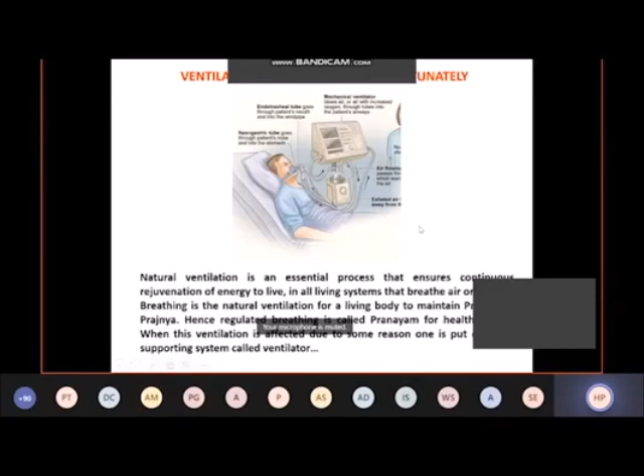In many hospitals across the world, data has already been provided by Professor Mohan Singh on what is happening across the world. And what is happening across the world? There are migrants everywhere, migrants in search of a comfortable place to continue the rest of their life. In fact, what I find is that human beings become migrants a little later. COVID is the fastest migrant in the world.

Because COVID is riding a migrant, it just gets a migrant as a host and travels all over the world. This is how COVID started migrating from one end of the world to the entire world. And it has made us human beings migrate from one place to another in search of comfortable living.

But that was because the ventilation in the human body is affected because of a small virus called COVID-19. What about natural ventilation in architecture or the built form in which all of us individuals and families reside? See, the definition of natural ventilation in architecture has been inletting of outdoor air into a space to control indoor air quality by diluting and displacing indoor pollutants, control indoor temperature, humidity, and air motion to benefit thermal comfort. This is a modern day definition of natural ventilation, created after maybe scientific study.

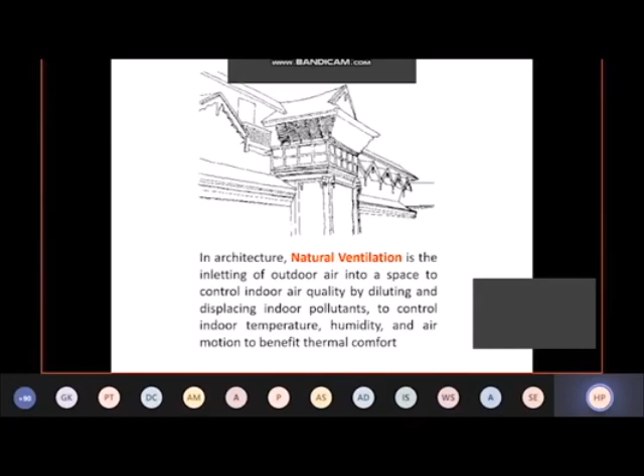But this was always known to human beings since ancient times, since the time human beings started making shelters, especially in the tropical world, because we all know that in the tropical world, it is next to impossible to survive without natural ventilation. And you can see this if you study architecture of the tropical world, which I have studied and I have done my PhD research into this particular aspect. Natural ventilation has been an essential part of all vernacular and traditional built forms. You go to any village in India, any vernacular or traditional built form. India specifically, because India has got multiple climate conditions, more tropical in nature.

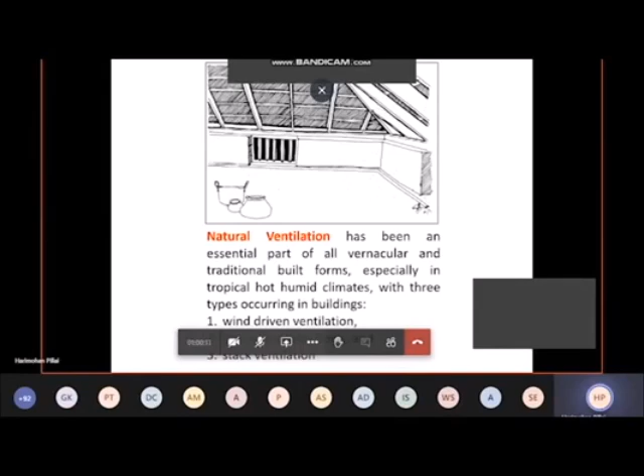So in all these tropical hot humid climates, three different types of ventilation systems happen: wind-driven ventilation, pressure-driven flow, and stack ventilation. All of us architects who have studied this in detail as part of climatology are aware of it. Where has all this knowledge system, which has been there as part of our traditional built forms, gone today? Look at the kind of traditional built forms which we have created in our world, the kind of houses that breathe for humans to breathe.

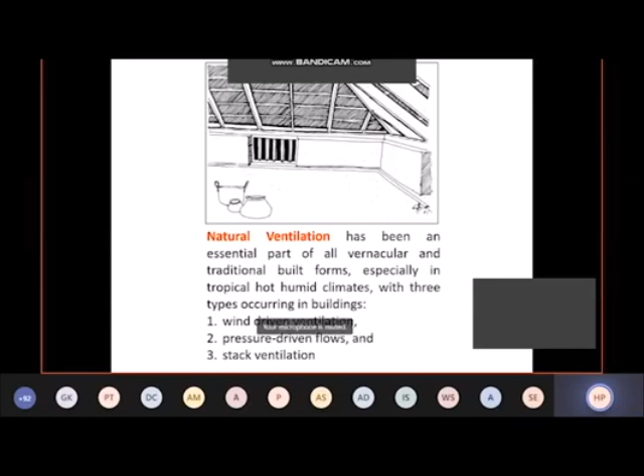We only have to travel from the north of India to the south of India, from the east of India to the west of India. We will see 8 different climatic conditions and fascinating traditional breathing spaces in a kind of an architectural zoning of India, which I have tried to create here. Whether you go to Rajasthan or Madhya Pradesh, Maharashtra, Tamil Nadu, Kerala, there are fascinating houses that breathe for humans who breathe. And this is all documented, very well known to all of us as architects.

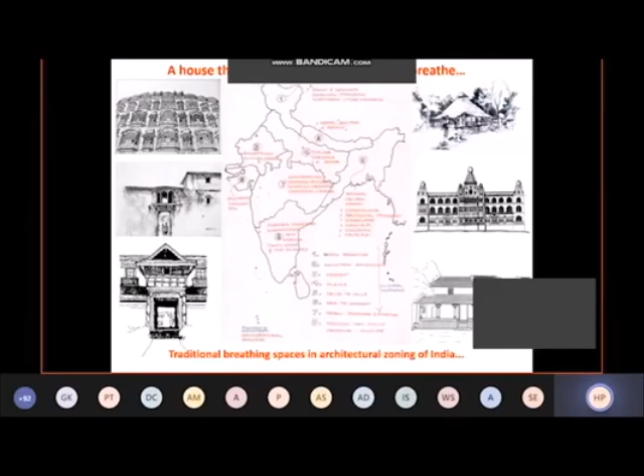Ventilation in transition spaces. We already knew for centuries how to create this. This is a simple example of a small 200, 300-year-old house which still exists in a village in Kerala. Transitional airlock. When you come from outside, hot sunshine, before you enter the main household, you enter into a transitional airlock space where the air temperature suddenly comes down, a well ventilated space, where you take rest for some time or where you relax and talk to your friends. And then you move into your inner spaces. Ventilation in transition spaces. We already knew about this.

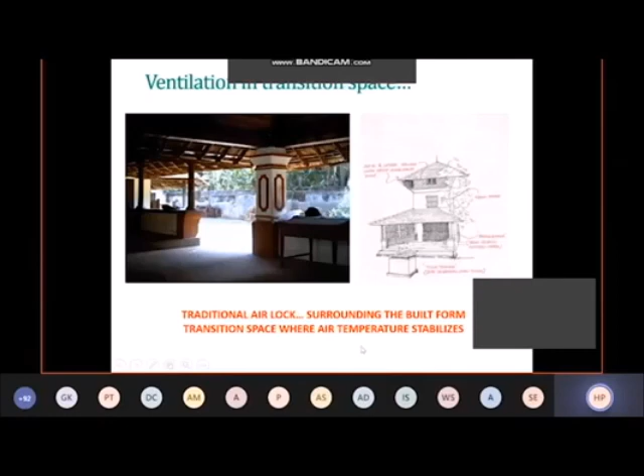Ventilation at many levels. You see, modern day architecture talks about only ventilation at fixed levels. We have fixed the levels of ventilation. We have something called a fixed sill level, fixed ventilator level, fixed beam bottom level, and so on. But if you look at traditional built forms, especially in our country, you will find ventilation at many levels, not necessarily at a fixed level. Here is an example of a wonderful ventilation which allows light as well as air at floor level.

It is the floor, actually, this is the landing of a stair. You come up the stair and you reach a landing which is not only ventilated with light but air as well. And these kind of ventilators you find at each floor level in houses in Kerala, very old, 200, 300-year-old houses in Kerala. I'm sure not only in Kerala, but in many traditional households across India, you will find not a fixed level of ventilation, but varying levels of ventilation at different levels.

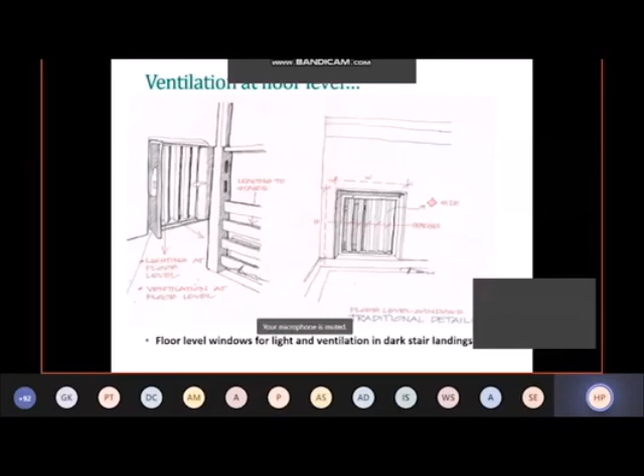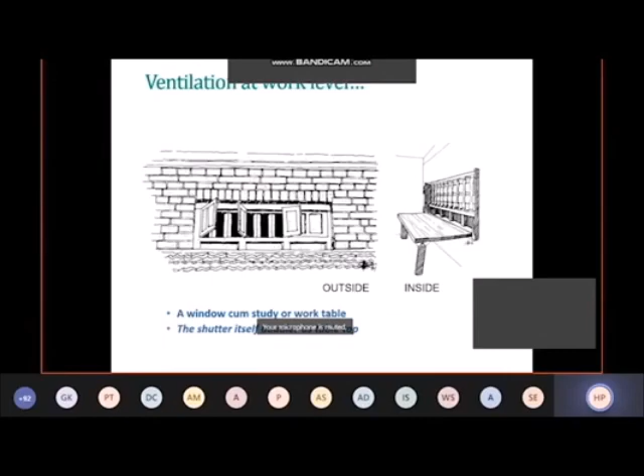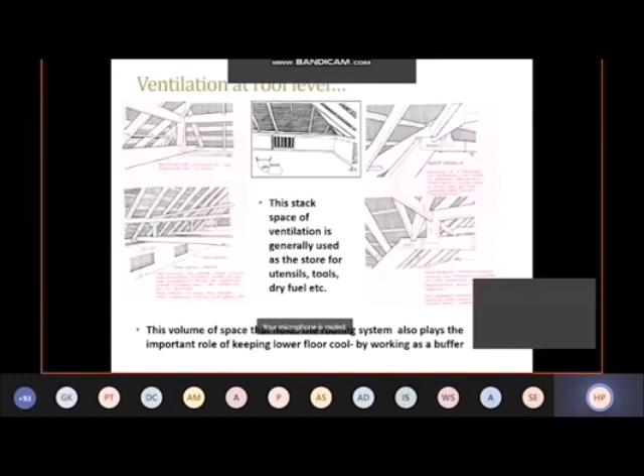The volume of that space, which is the roof, also has ventilation to ensure that from the living spaces below, there is continuous ventilation to upper levels and out into the open air. So all these things also work as a buffer to ensure temperature control in the spaces which are designed below these roof spaces.

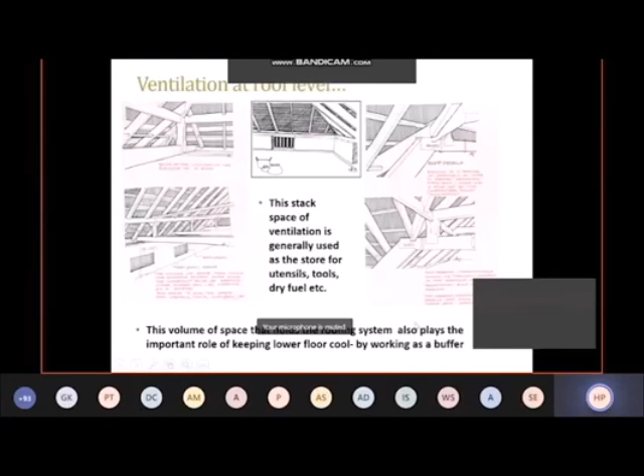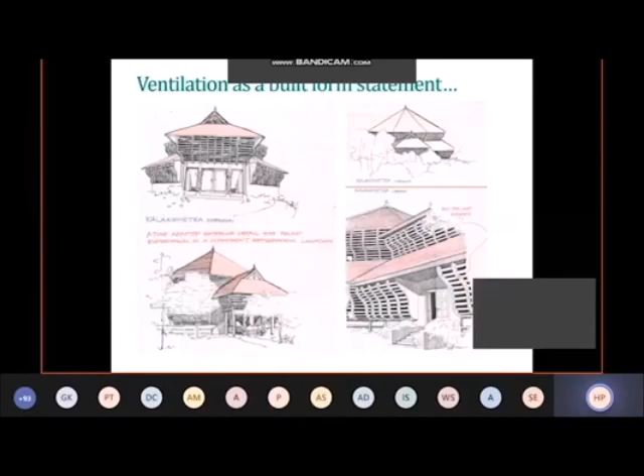Ventilation as a built form statement. Kerala's traditional architecture, if you look at the built forms, they are actually a built form statement of wonderful ventilation in tropical climate. Though this is not a built form which was made in the ancient time, this is inspired from ancient traditional architecture having wonderful ventilation.

We know very well that COVID has become a migrant which just captures a host, especially all those hosts who have been living in air-conditioned environments, getting treated in air-conditioned environments in hospitals, traveling in air-conditioned environments such as aircrafts, going through air-conditioned environments such as shopping malls and offices. They are the hosts on which COVID survives. But can COVID survive in a well-ventilated environment? This is something to be researched upon, and this is the time when we need to research.

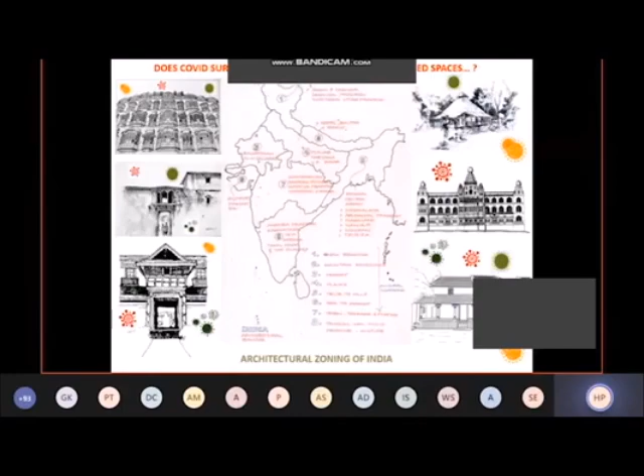World over, large number of humans have been confining themselves to artificially ventilated and air-conditioned spaces. Our body itself is a classic example of a passive system that continuously adjusts itself to changing temperature, humidity, and air flows in the natural environment. We adjust ourselves. When we come from sunshine to shadow, we adjust ourselves. Similarly, architecture spaces in ancient times have been created, very unique to each climatic zone, which provide necessary body comfort in each region. But active systems have standardized these living conditions.

That is the problem. We have to accept that active systems which we employ while traveling, in built forms, in work areas, have standardized living conditions. And in the process, these standardized living conditions have killed not only the uniqueness of traditional living, traditional architecture of each region, but also the uniqueness of the adjusting capacity of a human being. That is also killed. No capacity for a human being to adjust to the changing environmental conditions because of standardized living conditions created by active systems.

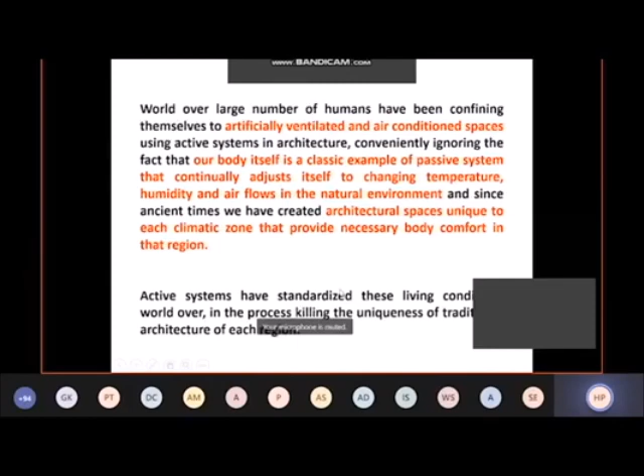There have been a lot of questions on active systems by many of the participants who have sent to me in advance, but I believe that active systems have only standardized living conditions, and it is high time we thought about these active systems, how to get rid of this active system and get back into the natural systems of living.

In today's emergency situation of the COVID pandemic, it is worth studying who or what kind of humans are most affected, architecturally speaking. How can we do this as architects and planners? Study what kind of humans are most affected because of COVID. Can we create data based on their architectural background? Do they belong to the category of folks living and working in an environment dependent on active systems? Or has the pandemic struck people who live in natural surroundings? Or will it continue to strike people living in natural surroundings? Or will it continue to strike people living in actively supported environments? This is a question we have to ask.

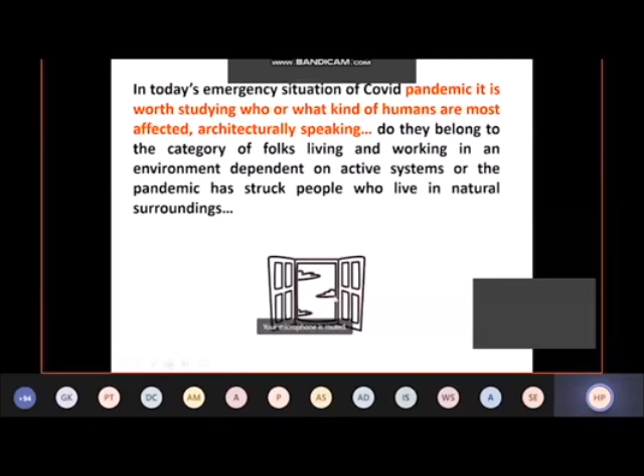This time, I believe, COVID time is ripe for the immense amount of data which is today available to us to do research as architects and planners. And where is this data available? This data is now available. Live data is getting created day by day because of this COVID pandemic. Data which is available to architects and planners to understand the relationship between health and the human built environment.

People know that a physician plays an important role in their health. We all know it. But sometimes building designers can play a very nearly equal role. This is something to be understood. Building designers such as architects and planners, who bring together several buildings in a dense formation of what we call a settlement or city, also play an equally important role like a physician.

And it is time, especially in these COVID times, that we started researching the role of architecture and planning in human health and longevity. Unless we research this, we will be nowhere, because we will just keep running from one kind of shelter to another in search of comfort conditions, especially from the point of view of longevity and health.

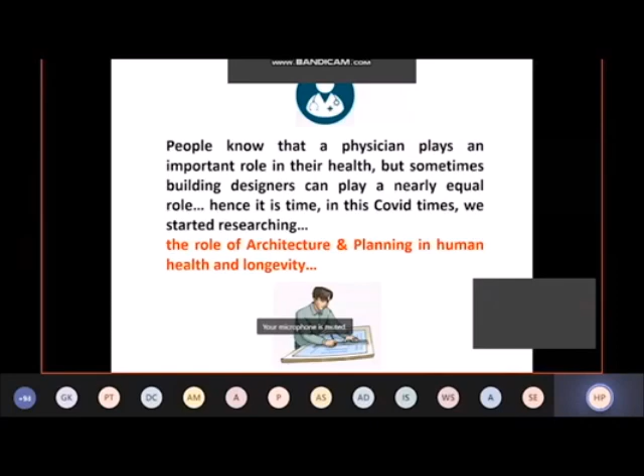So now, this is one tip which occurred to me: we have this app which the government has created and which has now been declared as open source code, only yesterday. To start researching, we need data. So why not add the nature of a person's living environment as part of Aarogya Setu, so that we can compare the health conditions of the person living in the built environment, and the data that we collect from individuals and families living in different built environments.

I'm sure it is possible to create through this open source code some aspects of the built environment. If it can be fed into this app, that will become a wonderful set of big data available for architects and planners to look at how to create a better sustainable built environment to stay safe and stay healthy.

I think I would end with this, because if it is all true, why not go back? Let's open the windows to a better world. Let us not keep our windows shut. Let us just open the windows to a better world and live in a ventilated environment. Thank you. Thank you very much.

Appreciate your opening statement. You said very rightly that the previous speaker started with big and you started with small. Your presentation was very appealing, with a lot of illustrative, graphical and pictorial material, which will really be great food for thought for our planners and architects. And you highlighted very well the rich traditional design we admired in our early childhood. But today we are moving on to a modern and conventional way of living.